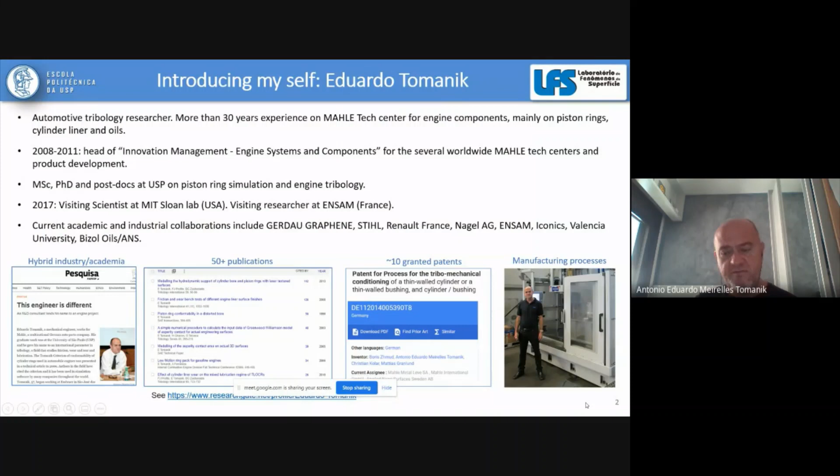So what I will cover today is: after a brief introduction about combustion engines and tribology, the impact of CO2, which nowadays is very important, and a little more detail about engine friction and the CO2 impact. As I told you, especially in Europe, this is a very important topic. There is a lot of talk and investment in electrification.

Then I will go into a little more detail on the lubricant regimes, oil viscosity, roughness of the parts in the engine, especially the cylinder liner. A few words about computer models, and something I have started to work on for less than 2 or 3 years: the use of artificial intelligence models to predict fuel consumption.

Okay, so we start with the introduction. Well, there are a lot of tribological parts in a vehicle, say from the engine, gears, brake, etc. In most cases we want to reduce friction. Of course, brake and transmission and the clutch are at least an exception.

What I will talk about today is mostly engine tribology, piston ring, cylinder bore, but the concepts about roughness, lubrication, etc. are valid in most cases for other components too. So for those not directly involved in engines, there may still be value in looking at the fundamentals, because the same thing applies to other components.

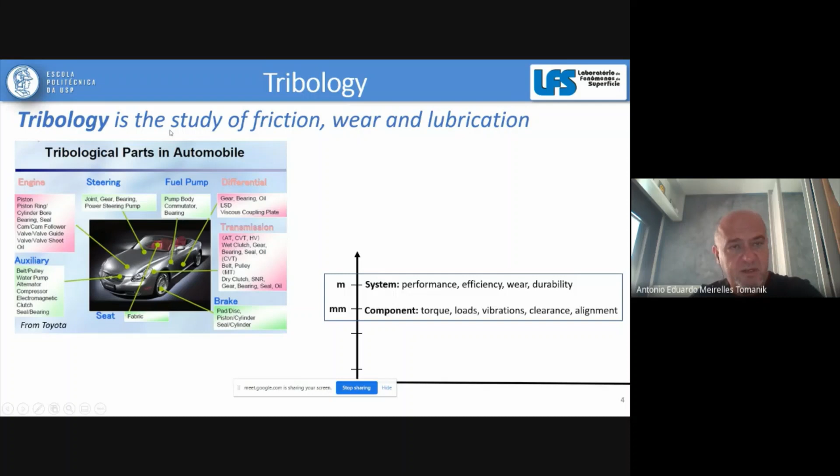Okay, so for tribology, most of us engineers work by looking at the system. We want to improve performance, reduce wear, and have longer durability. This is usually at the scale of meters or millimeters. If you go to the component level, then we want to calculate torque, loads, vibrations, clearance to assemble and under working conditions, etc. For tribology, the study of friction, wear, and lubricants, we need to go smaller to see in more detail what happens between the surfaces.

For example, it can be a piston ring and a cylinder liner, but it can also be a bearing versus the crankshaft, and it can even be your shaving against your face. Okay, we are not going to cover human tribology today, but that is of course a topic too. So, on the micrometer...

level, we pay attention, tribology pays attention to the contact - asperity contact, elastohydrodynamics. I will say a little more on that ahead. Wear, pitting, scuffing - we pay attention to the asperity. So even surfaces that appear to be very smooth, if you pay attention or look in detail, you're going to see there is roughness, and it has a strong influence

on the tribology. And then if you go to the nanometers, then we also see the tribofilms. Most oils have additives - anti-wear and friction modifiers. This is also important, although very difficult. Still, let's say, few universities really work on modeling of tribofilms.

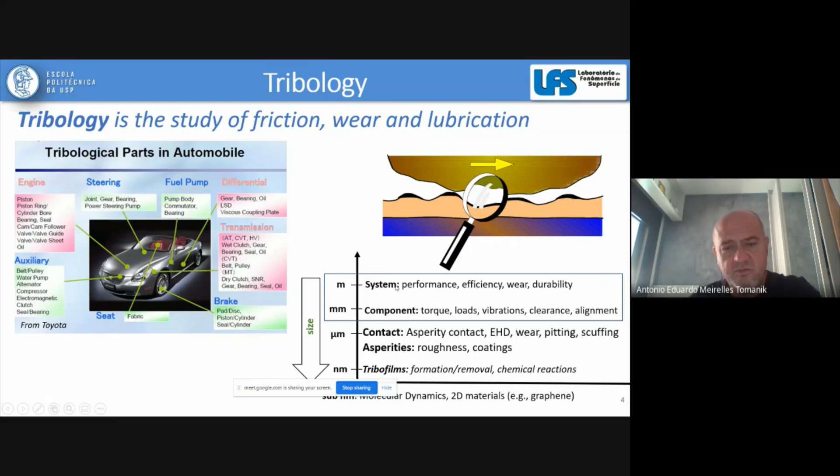And if you go to sub-nanometer, then there are so-called 2D materials nowadays, and graphene is one example, which is also my current topic of work, but this is too detailed for today. So today we are going to move around between micrometers and millimeters, okay?

So if you take any component that is rotating or sliding - you can say piston ring versus cylinder liner, or bearings, or an electric motor, and so on - usually we have the inputs from an engineering perspective: geometry, speed, load, materials, lubricant, temperature, and ambient conditions.

From the tribology perspective, we wanted to model, calculate, measure, and eventually reduce friction, wear, I would say also hydro and asperity pressures, but also noise and failures that we needed to avoid.

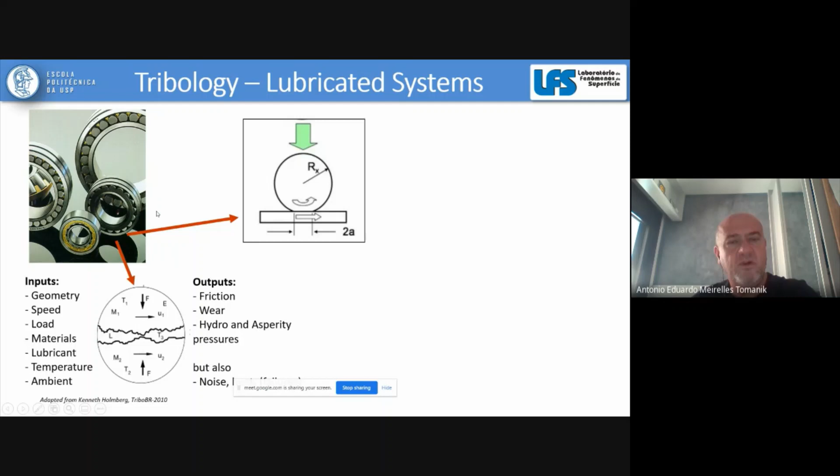So if you take an example of a rotating bearing, a typical component for most machining, not only in the engine but any machine that has rolling bearings, then there is a roller against the races, the external ones.

If you really go into the details, and this is the subject of study for tribology, we are going to calculate what are the pressures appearing here, what is the oil film thickness that separates the parts, which is very, very important. If you try to run dry, most of you know that the component will not survive. So we really depend on the lubricants.

For those not experienced, the oil film thickness separating the surfaces is in the order of 0.1 to maximum 10 micrometers. To give an idea, the diameter of human hair is between 50 to 100 micrometers. So we are studying things that are sometimes 1,000 times thinner than a human hair.

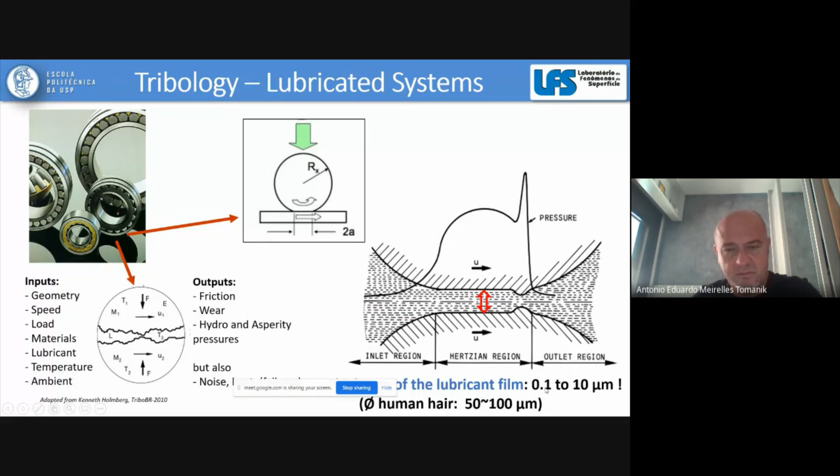Let me talk briefly about the laboratory I work in at the university. Remember, today I'm talking as a university researcher, not as an industrial researcher. There we have characterization tools and equipment to measure the surface, so we pay a lot of attention to the roughness.

We do a lot of modeling and simulation, and I will show some examples later on. We, of course, as most of tribology, do a lot of experimental work and tribological tests: pin on disk, SRV, and so on. We also do courses and lectures, as I'm doing today.

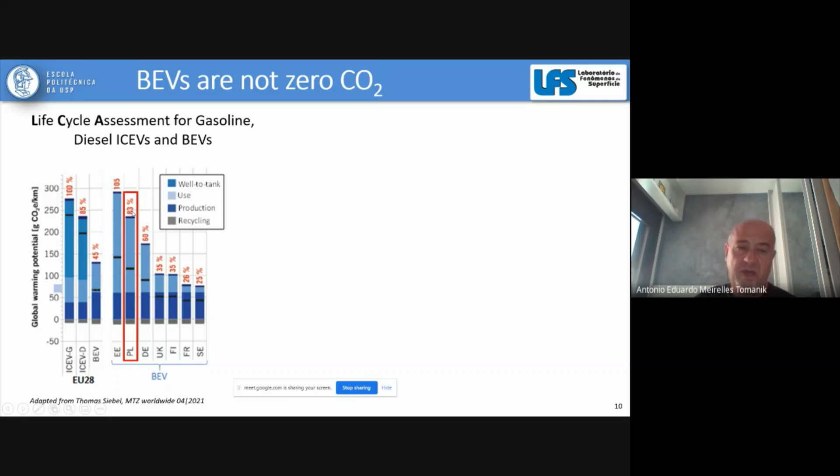So if you buy a new electric vehicle, probably for the first 2 or maybe 3 years, you have produced more CO2 than if you buy a combustion engine. And this is from Audi. References here, for the ones that want to check the details.

But also, in my opinion, a big problem is our trend to move to larger and larger SUVs. Data from Audi shows that if you buy, if you are rich enough, I am not, a large Q7 electric vehicle, indeed you are producing more CO2 along the life, 200,000 kilometers, than if you buy a combustion engine A4. And especially until 100,000 kilometers or so, if you compare this A4 and the Q7 Europe, in most cases you are producing more CO2.

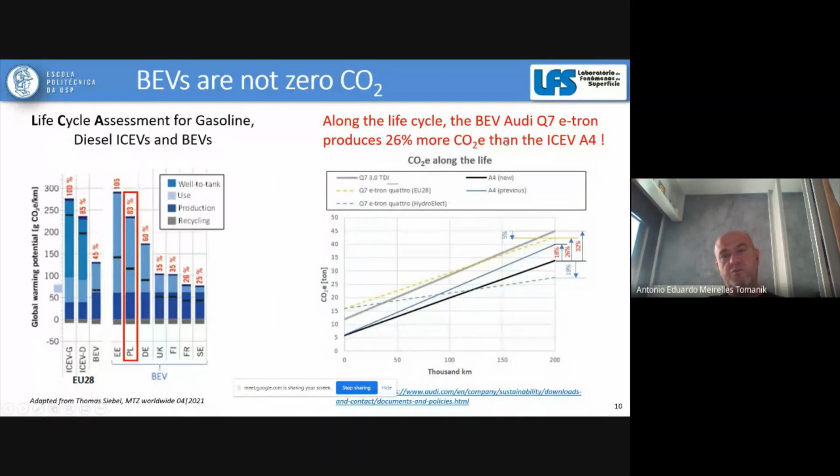Even if you move the electricity to a greener version, let's say hydroelectric electricity, you will still have to run more than 100,000 kilometers to reach the break-even, because you produce more CO2 to produce the car, the batteries, and so on. So this, in my opinion, makes it important that we still make efforts to improve the efficiency of combustion engines. Combustion engines will live for decades yet, so we need to improve and reduce the CO2.

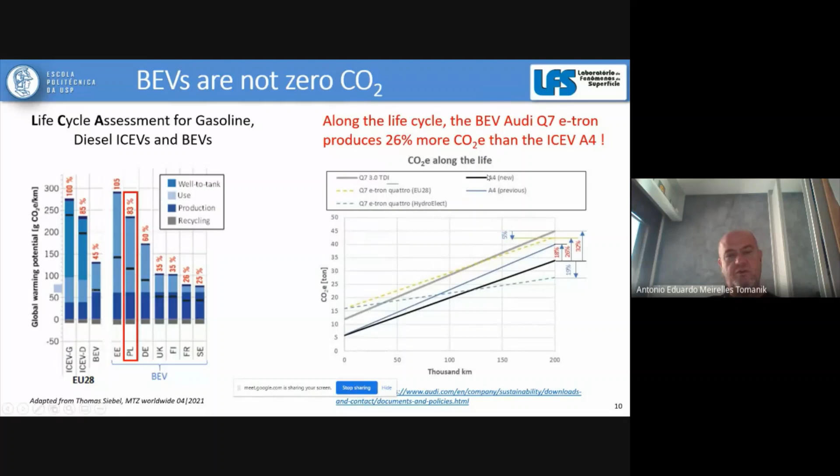I'm not going into full details, this is a little more complicated, but if you look at the references, almost all of them agree that engine friction losses are around 10% of the fuel energy. So most professionals and academics say, if I zero the friction losses, I'm going to save 10% of fuel. This is wrong, because you spend energy to overcome friction losses only after combustion.

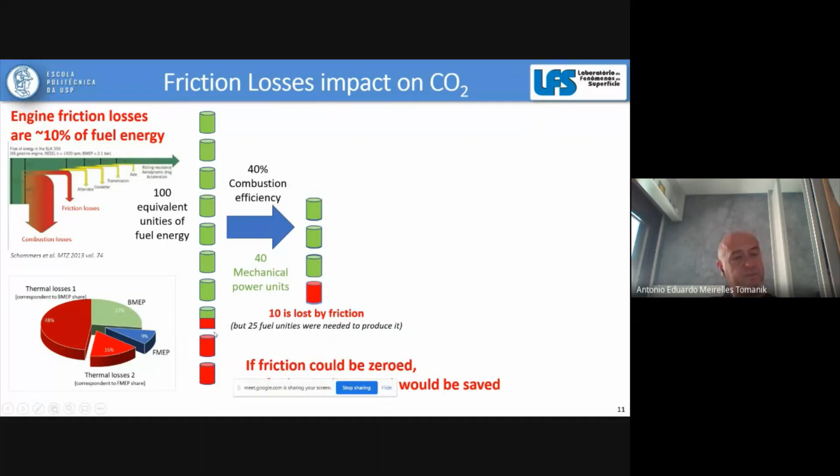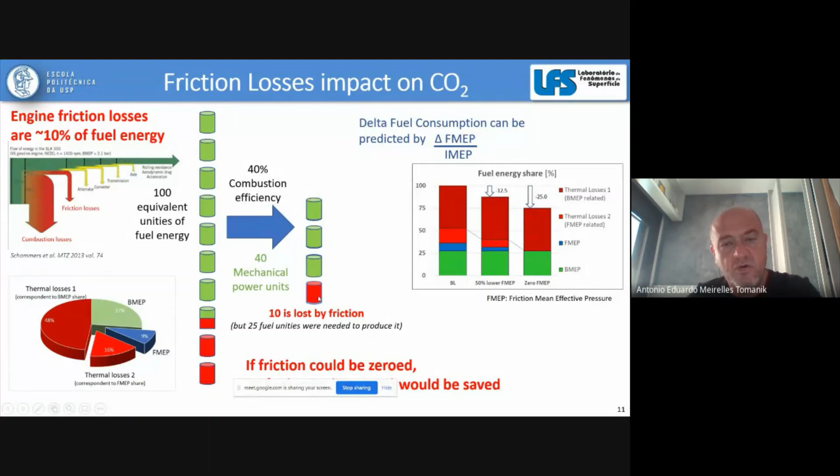And as you probably know, combustion efficiency is only around 40%. So in order to overcome the 10% of friction losses, you actually have to consume more energy. So indeed, to zero it would be very difficult. But for example, if you reduce by half the friction losses on the engine, we are going to save not only 5% of fuel and 5% less CO2, but 12.5%, because you need to consider the combustion efficiency, since friction losses occur only after you have converted fuel energy to mechanical energy.

In terms of friction reduction, if it's important to reduce fuel consumption and CO2, we need to pay attention to the components that produce more friction losses. On the combustion engine, about 50% is produced by the piston, liner, and ring.

You can visit this slide later on, but I would like to remember, we wanted to reduce friction, for example, on the piston, by increasing the installation clearance to reduce skirt roughness, to make a shorter skirt, but very importantly we need to keep the durability. If you increase the installation clearances, maybe you have noise problems. So in all cases, we have to make compromises in order to reduce friction and wear while keeping good engine performance.

The same for the ring, for example, it's relatively easy to reduce friction losses if you reduce the tangential load of the ring, but there is a risk of increasing oil consumption and so on.

As an example, this is a Brazilian case we did in 2013 with computer models, shown in red. This slide is more to motivate you. Later on I'll give more details on how we ran the computer models. We estimated that by improving the components, we could reduce friction by 12%, and for a given engine, we could reduce fuel consumption by about 2%.

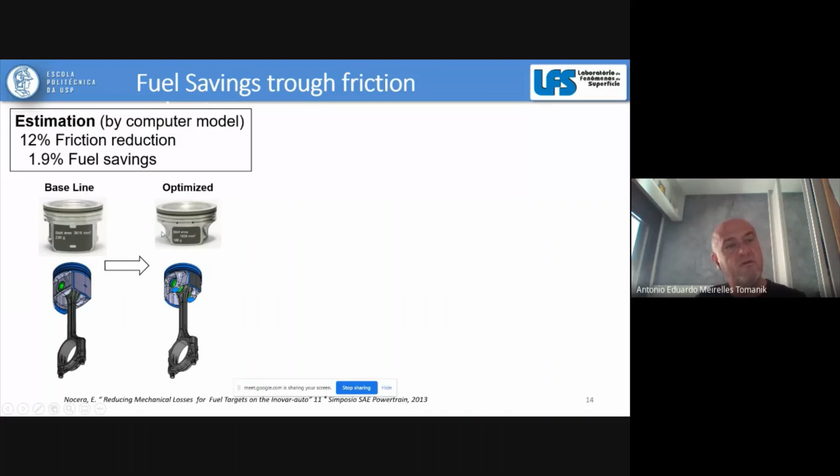So we went to the OEM, the car manufacturer, presented the modeling work, asked for the engine, and 6 months later, with the improved parts, the car manufacturer measured not 12% but 21%, much more. Details I will not cover today, but there are some reasons for that. And fuel savings at that stage were the same order that we had predicted.

FTP is the urban transient cycle for emissions in North America and also in Brazil. So we got 1.3 and 2.3. The customer was very satisfied with the results.

Here are the savings on the complete engine map, speed by torque. And also here are the transients in terms of RPM and torque of the engine, because these emission transient cycles, for those familiar with them, are very complex. At that time, we were very happy to be able to simulate, predict, and obtain the results. The good thing about modeling is that you spend relatively little money to find potential good solutions, and only after that do you go to produce the parts, which costs more. This was also published in English in a Brazilian Congress.

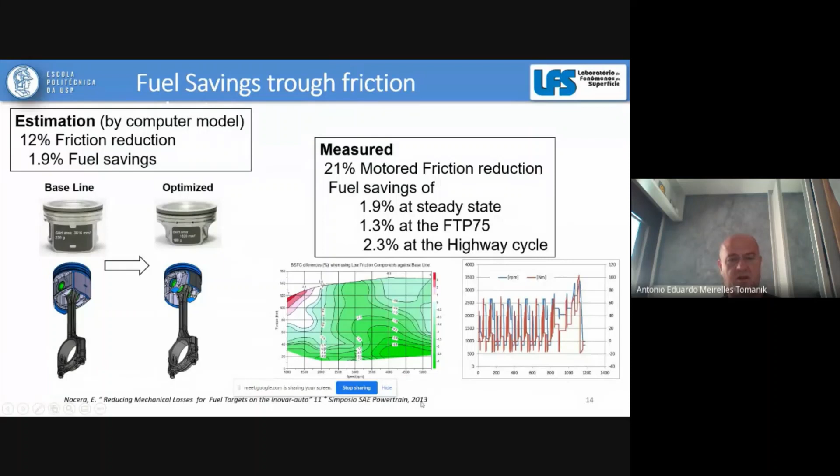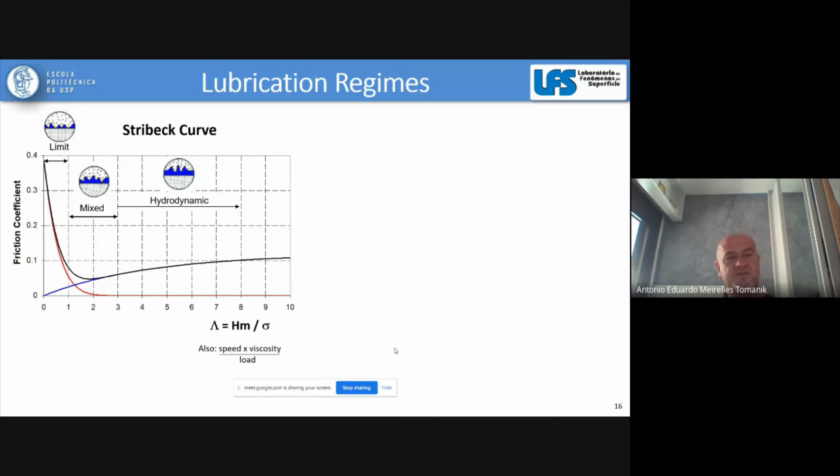Moving to lubricant regimes, oil viscosity and roughness. I used to say that if you wanted to understand tribology, the first thing you need to learn and really understand is the so-called Stribeck curve. Any tribology book will tell you about that, but in my opinion, not everyone really understands how to read this curve, and it's very important.

What does the Stribeck curve try to tell us? That the coefficient of friction depends on the separation between the parts divided by the roughness. So Hm is the oil film thickness, and sigma is an indicator of the roughness between the parts. If you have a relatively thick film, you are in a complete hydrodynamic situation, so there's no boundary friction, meaning no contact between the parts, and therefore no wear. This is the blue line.

But if you increase the speed, you increase the friction because it's hydrodynamic. On the other hand, if your load is higher or your surface is rougher, you enter what most components work in, the so-called mixed regime, where friction is a combination of hydrodynamic and asperity contact. If you go to very high loading or very low speed, you have strong contact between the surfaces, oil viscosity becomes almost non-dominant, and you face a risk of wear and scuffing. Books usually show what's called the film parameter.

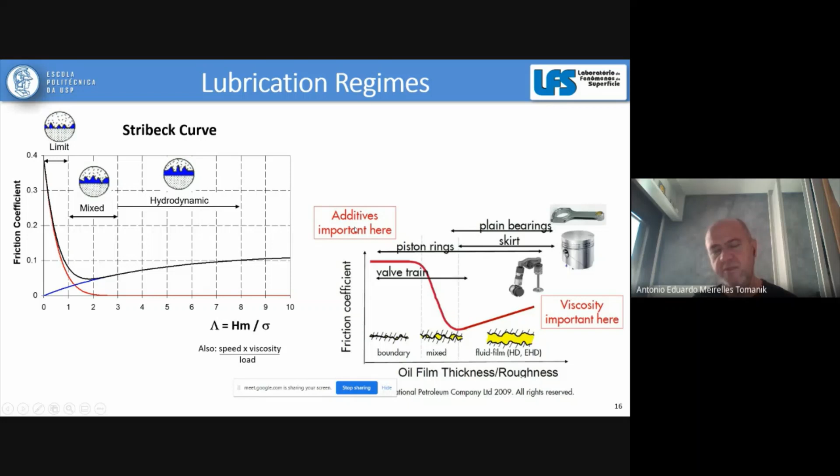So low viscosity oil will move it toward the mixed regime. On the other hand, when you have strong contact, oil additives become important - especially ZDDP, the common one for wear protection, and friction modifiers. Molybdenum is the typical one you find in engine oil.

This is also very important because when planning to study or run a model, you need to pay attention. It makes no sense to use boundary and mixed models for plain bearings and skirts because they work in the hydrodynamic regime, and the opposite is also true. The piston ring is one of the more difficult cases because it can range from boundary to full hydrodynamic.

I will talk a little more later on that.

Piston systems are very complicated systems because they're transient. The combustion pressure, as you know, goes from almost atmosphere to nowadays 220 bar or even higher for heavy-duty diesel. There are temperatures, so the components, take the example of the piston, due to thermal deformation, change the profile and dimensions from the drawing.

This is an example. The piston is hotter on the top, so it thermally deforms more, creating things like that. Also, if you take the engine bore, the region between the bores is more difficult to cool.

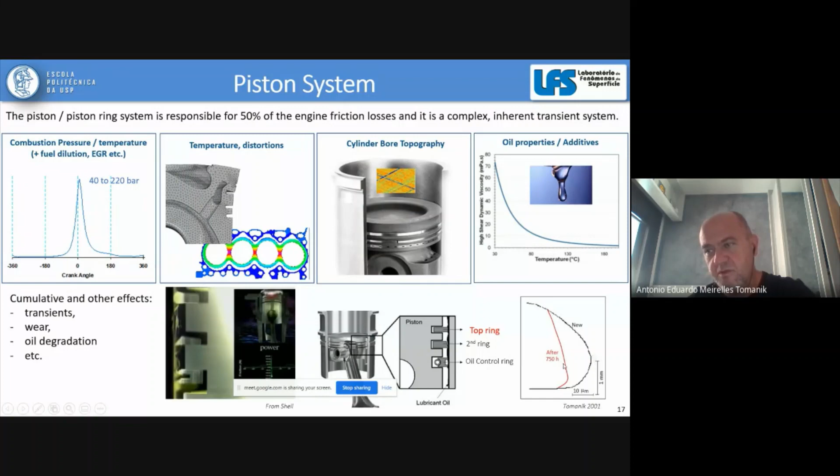There are only a few in the world - in Japan, Germany, and Brazil we have one. They can measure the friction at each crank angle of the piston versus the piston ring.

So if you want to understand wear and scuffing, you need to pay attention to the top dead center. But if you want to save fuel, since at mid-stroke the speeds and power are higher, friction losses are higher, you need to pay attention to the mid-stroke. This combination is not trivial - it's complex, but necessary if you want to solve both friction wear and fuel consumption.

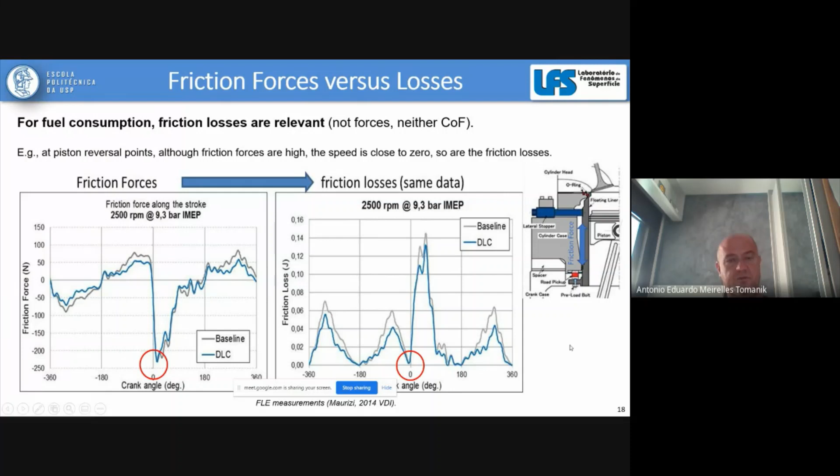Going to some real cases now, okay?

Most car vehicles in Europe and Japan now use what is called thermal spray. So instead of cast iron, which is still common on heavy-duty diesel, they use an aluminum block but with a coating of thermal spray. Different car manufacturers use different solutions, eventually similar but with different names.

So some of them are called PTWA, LDS - this is mainly Daimler, BMW, and Nissan - and it's very smooth. If you see it, it's very, very different from normal cast iron honing. I will give a little more detail.

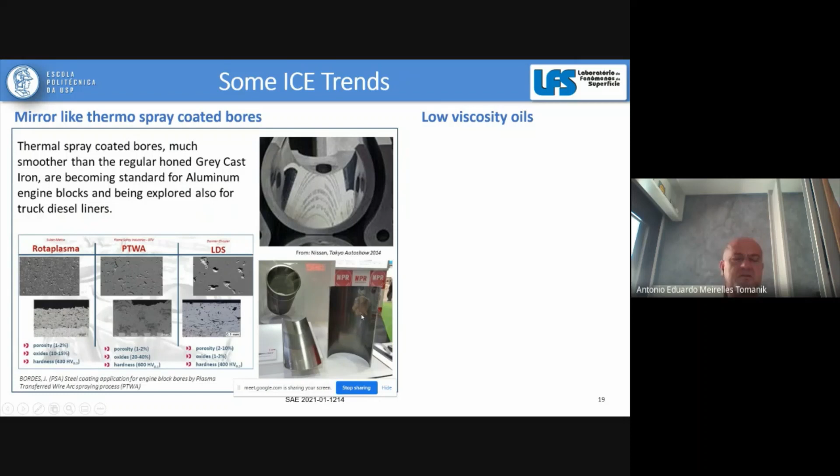It's so smooth - this is a real photo, and there is a paper on top, so this is the reflection. That's the reason it's called mirror-like. Here is another photo, also from this case, from Nippon Piston Ring and Hino, a Japanese diesel engine in this case. You can see the reflection of the hand of the guy.

I will say a little more on that because it's a very hot topic to investigate nowadays and needs special attention.

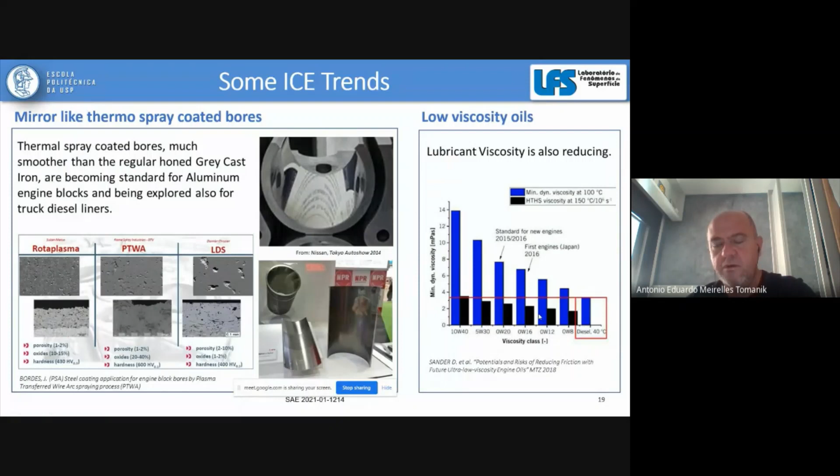This may be 2 times more viscous than the diesel fuel, so this is very good for fuel saving because you have very little hydrodynamic friction losses. But as you can expect, there are also problems of contact.

I'll start to go a little faster because I'm spending some time. In most research groups, when you want to optimize cylinder bores, this is the way we do it at São Paulo University. We start with actual cylinder bores or prototypes, do very detailed topography measurements, then go to rig tests, modeling, and finally to engine models.

These approaches are not only academic. Here I reproduce papers from industries about the same topic, for example from Audi, from Daimler, and so on.

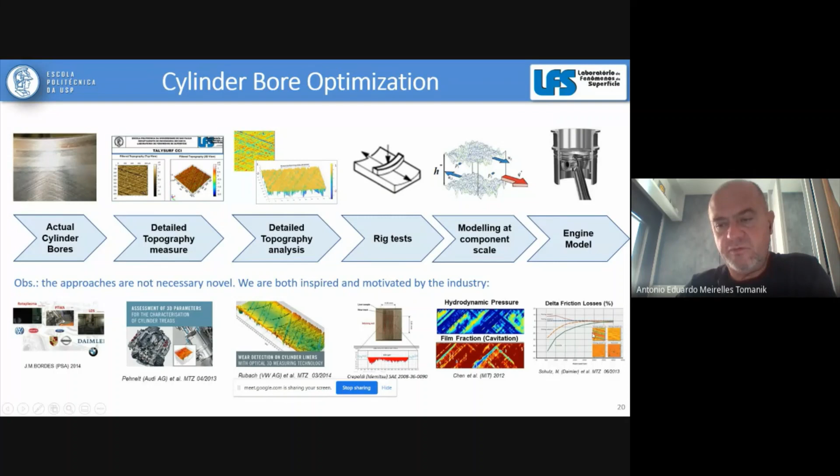Very important: I told you the Stribeck curve is, in my opinion, the first and most important thing you need to know about tribology. And if you remember, roughness is important to understand because the Stribeck curve uses oil film thickness divided by roughness. But most people use Ra or Rz as indicative of roughness, and I consider this very risky, not to say wrong. Why? Because both Ra and Rz do not differentiate a peaked surface from a valleyed one.

So these two surfaces have the same value of Ra, and you can imagine a part sliding here - this will have a lot of contact and wear, while this one probably will be very good. So Ra and Rz are not enough to describe roughness in most of our components.

So please use at least the Abbott curve. This was developed by Volvo decades ago, and they use 3 parameters called Rpk, Rk, Rvk - these describe or quantify the peak heights, the valley heights, and what is in the middle, the core. I don't have time today to cover that, but please do not use Ra if you want to investigate tribology. You need at least to use Rpk, Rk, Rvk, which most roughness equipment nowadays can measure without problems.

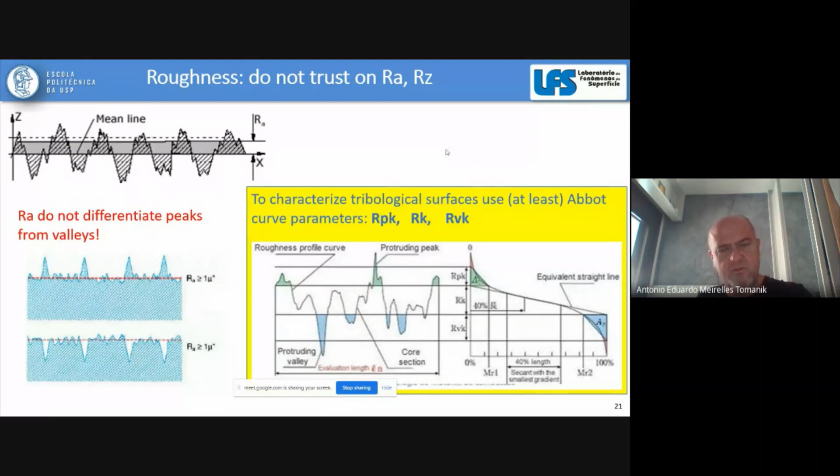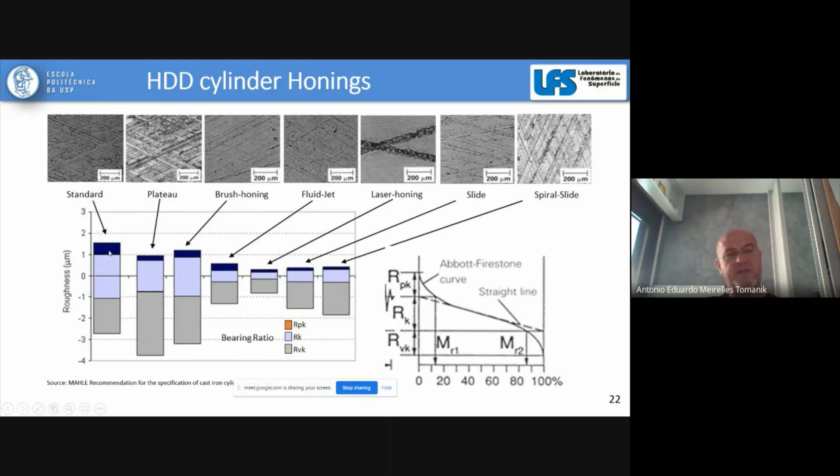This plot shows different cylinder honings from the standard plateau. This is for heavy-duty diesel. I'll show you next the ones for mirror-like finishes. In this plot, the dark blue color here is the Rpk. I like this plot because it separates what is the valley, what is below the surface, and what is peak above the surface.

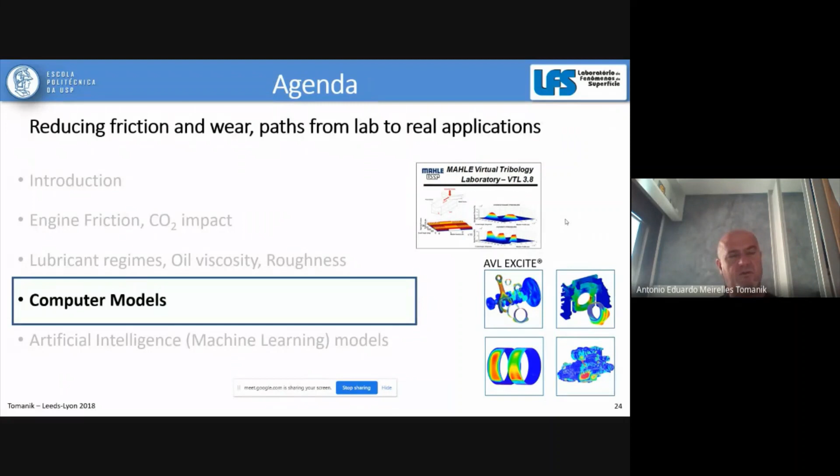Going a little into computer models - more and more engineering universities and industries are using computer models because they are cheaper and usually allow us to investigate things that would be very difficult to investigate by tests. But it's always the question: how complex or comprehensive should your model be? If you want to simulate the complete engine, or if it really goes to the fundamentals.

A good approach is usually to understand which problem you want to solve. If you want to improve the roughness of the cylinder, running a simulation on the whole engine would take forever and need a lot of data. So usually it's better to start from the fundamentals, as I'll try to show later on, and more and more move to the complete engine in order to know, for example, how much durability or fuel saving would be achieved.

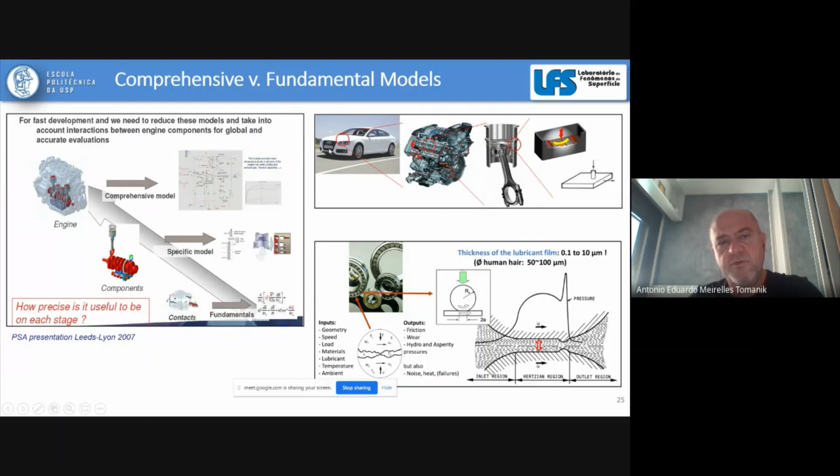So how you approach this is key to having a good strategy. The same goes for tests - for example, you can do car tests, but these are very expensive and have a lot of variation because you depend on the driver, the gasoline, and so on. You can do engine tests, component tests, or if you go to the fundamentals, a simple pin-on-disk test. Again, how you choose this depends on what you want to solve and how much you're prepared to spend.

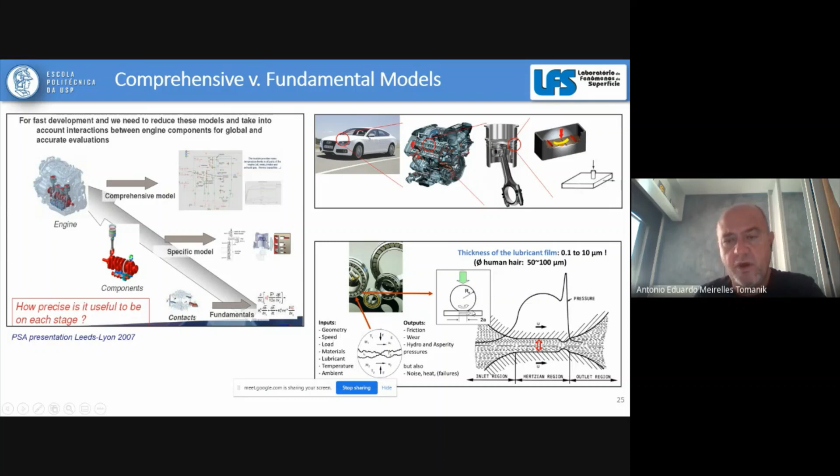And this I showed before - let's say if you go really to fundamentals, it's good to have some computer models to help you. I'll show some examples.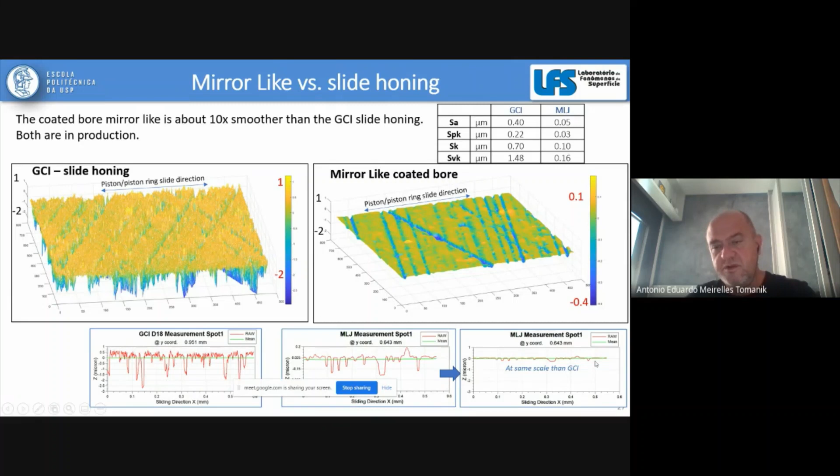One problem is that roughness equipment will increase the scale to show the roughness. So if you receive a measurement of the gray iron versus the mirror-like one, at first glance you may even consider this one rougher than that one. But when I put them on the same scale, from 1 micrometer to minus 2, you notice how smooth this new surface actually is.

You also need to pay attention to waviness. Usually your roughness equipment filters the waviness, and for most cases this is not a big problem. For the sliding honing, the amplitude of waviness, SWT, is around the order of the SA roughness. But for the mirror-like surface, since SA is much smaller, almost 10 times lower, waviness becomes important — it's 10 times higher than the roughness. So if you neglect waviness, you risk having problems.

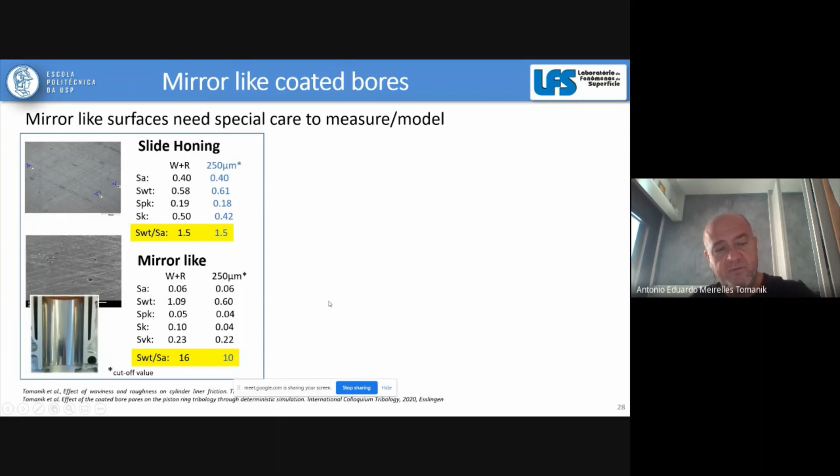This is covered in more detail in some of my papers. Also, every time I tell you, don't trust photos and reports - try to see the real part, especially since these mirror-like surfaces can easily mislead you.

Take this example: suppose this is a surface of a given machine or combustion engine equipment - I'll show later what it is. It has a very nice finish, with plateaus and some valleys to receive the oil. Most tribology guys will be happy with this kind of surface finish: a smooth plateau area that can support the contact, plus valleys and dimples to serve as oil reservoir.

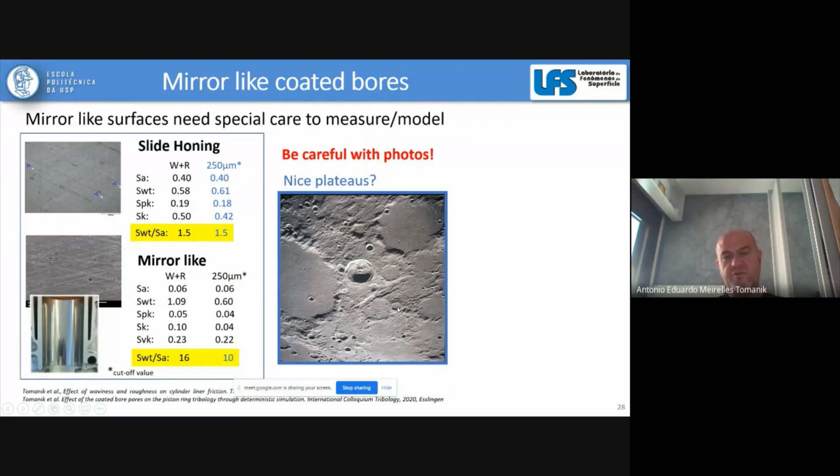But what do you think about this one? It appears very bad, very rough. So if one needs to choose between this surface finish and this one in red for low friction and low wear, most people will choose this one. But actually, they are the same - it's just rotated.

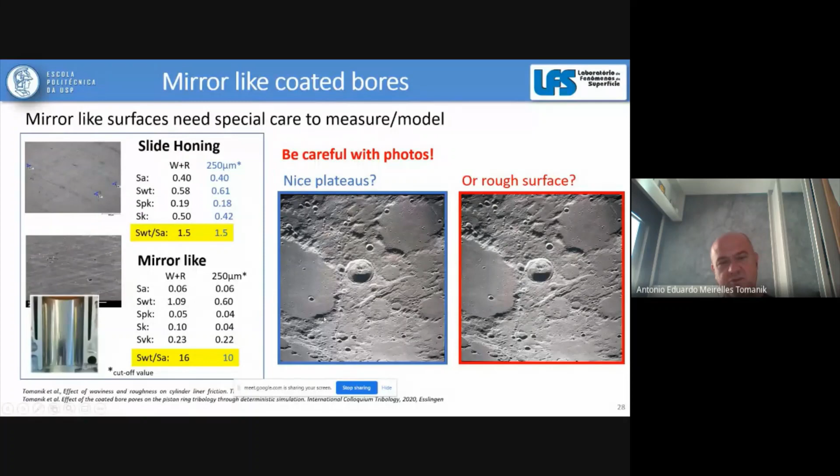They are the same surface, but our brain is used to thinking that light comes from the left. I don't know why - this isn't tribology, but it's how we think. So when you see shadows here, you think this is a plateau. I'll come back to this.

Same picture, same photo - I just rotated it. Now you're going to think this is a rougher surface. So, to be honest, I've made some mistakes myself. I went to study this because in the past I made mistakes where a surface with protuberances was actually dimples, or vice versa.

I'll go faster into the details, but at USP, together with MAHLE, we developed some relatively simple codes you can use to simulate, for example, a piston ring versus a cylinder liner - an academic version is available for anyone who wants to try. You input velocity, pressures, boundary coefficients, and so on, and it calculates the hydrodynamic and asperity contacts. Hydrodynamics are produced by the oil, and asperity contact is from the material contact.

In this case, I compare the same scenario: a piston ring moving at 1 meter per second, maybe halfway between top dead center and mid-stroke - at mid-stroke it would be around 10 meters per second, depending on the engine. Comparing 100 Celsius versus 40 Celsius, you see that at 40 Celsius, because the oil viscosity is higher, you get a much higher pressure.

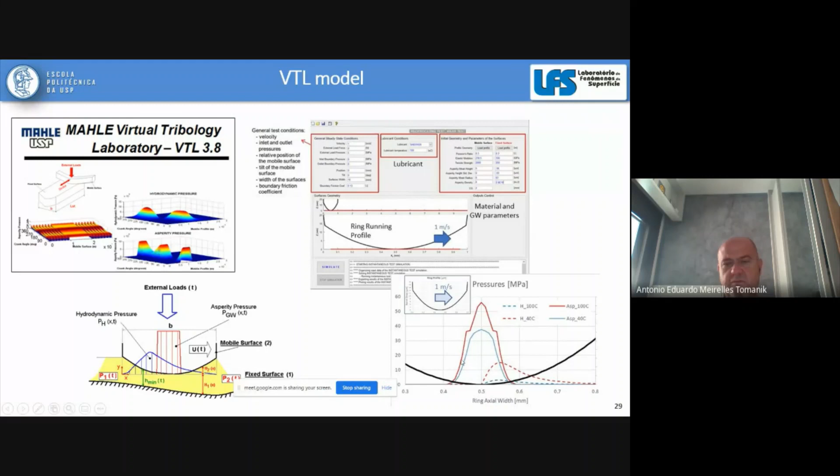Sorry, there is a mistake here, some colors problem. I will skip it, but believe me that when you increase the viscosity, you have more hydrodynamic pressure and less asperity contact.

At the time, we published a paper investigating several oil viscosities in a ring versus liner tribo test. Nowadays it's considered that at boundary conditions, if you decrease the viscosity, you increase the friction. This is not trivial, but believe me.

Then we ran the simulation and were able to predict some things. When we put the viscosity into this Stribeck curve, it's nice to see that all of the cases joined the same curve.

There are also effects of friction modifiers. As I said, for one of the oils we ran a formulation without and with friction modifier. The friction modifier was able to reduce friction in the boundary mixed regime, but when you increase the speed, it goes to hydrodynamic, so there is no influence of the friction modifier because there is no contact between the parts.

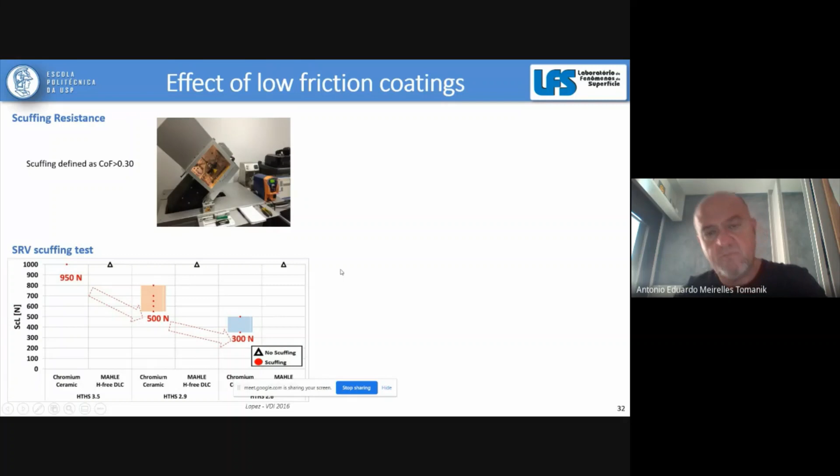There's also the case of low friction coatings, DLC for example, diamond-like carbon, but for this you usually need experiments. There are few models nowadays that can deal with that. This case shows a paper published by a colleague of mine in Germany, who investigated diamond-like carbon rings with reduced oil viscosities and the scuffing resistance. DLC was very resistant, high resistance, when using low viscosity oil.

We also made tests on engines. This is another paper, from a colleague of mine who is Polish, comparing the wear on chromium nitride PVD versus the new DLC ring coatings.

There are very good commercial codes. The ones I showed you are academic, relatively simple, but pay more attention to details. One that several companies use is AVL Excite. You can model almost the complete engine and even the car, investigating noise, vibration, and so on. This is usually what car companies have licenses and trained people for.

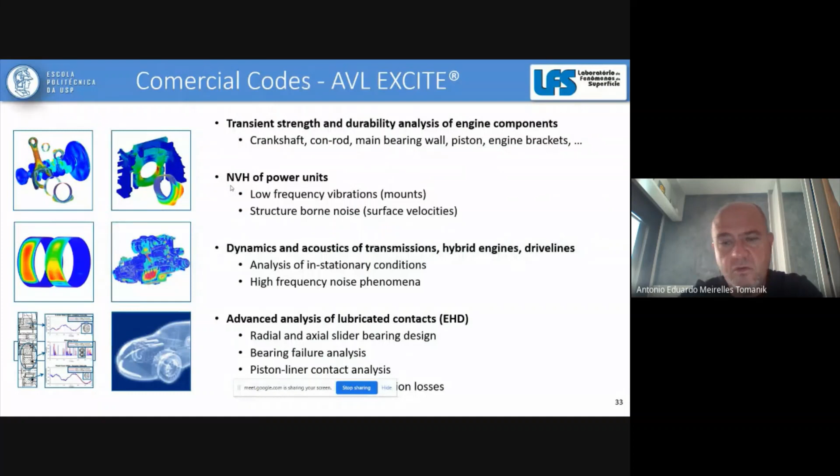At the university, we try to collaborate with AVL, running more detailed cases, not the complete engine. We've published some papers. I'll skip the details, but I call attention to the oil film thickness calculated by AVL for grey cast iron versus mirror-like surfaces, where the oil film thickness goes down to 0.1 micrometer.

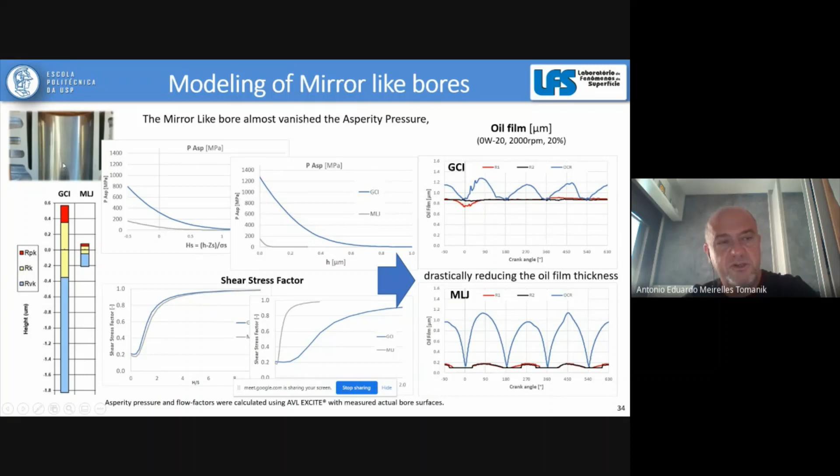This is, if you remember, 1,000 times thinner than a human hair. This is how cars are running nowadays, with such mirror-like surfaces, and working well, if you know. A little more detail, I will skip it, this is too detailed.

I'm running out of time, so to be safe, but we calculated the friction losses. In that case, at least, just reducing the oil viscosity decreases hydrodynamic friction losses but increases the asperity one, as predicted by the Stribeck curve. So indeed, at least for piston rings, there will be no advantage of reducing the oil from 10W40 to 0W20.

But if you go to smoother surfaces, then you have a big saving. So nowadays the main message, and we've published several papers on this, is that you need a combined approach. If you just reduce the oil viscosity, you may risk wear and asperity losses. If you just use mirror-like surfaces but keep the same oil, you're probably not benefiting from the more expensive surface finish. You need to use both, as car companies are doing: smoother surfaces combined with lower viscosity oils.

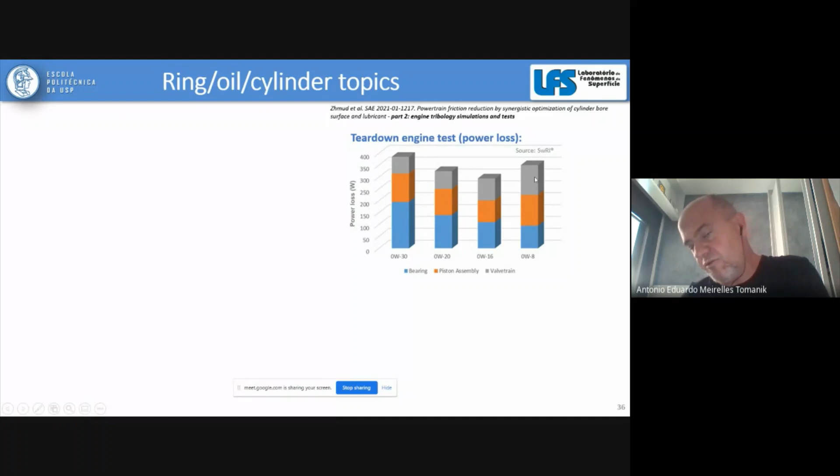Recently this year, we also published, in collaboration with Valencia University, papers using not only simulation but tear-down engine tests, measuring the friction losses of different components - bearings, piston assembly, valve train - for different oil viscosities. We found there is an optimum in this engine, at least 0W16. If you reduce even more the oil viscosity to 0W8, friction losses increase. It reduces for bearings because they still work in the hydrodynamic regime, but it increases a lot on the piston assembly and especially the valve train, which work in the mixed and boundary regime.

Then we investigated several cases, different velocities, different oils, and so on. I'll skip that, but the paper is interesting in my opinion. We also predicted the wear - the mirror-like surfaces, because they almost zero the asperity contact, are able to reduce a lot, at least by simulation, the ring wear.

Going to my last topic today: artificial intelligence. As you know, all industries, but also banks, medicine, all areas are using, especially, machine learning models.

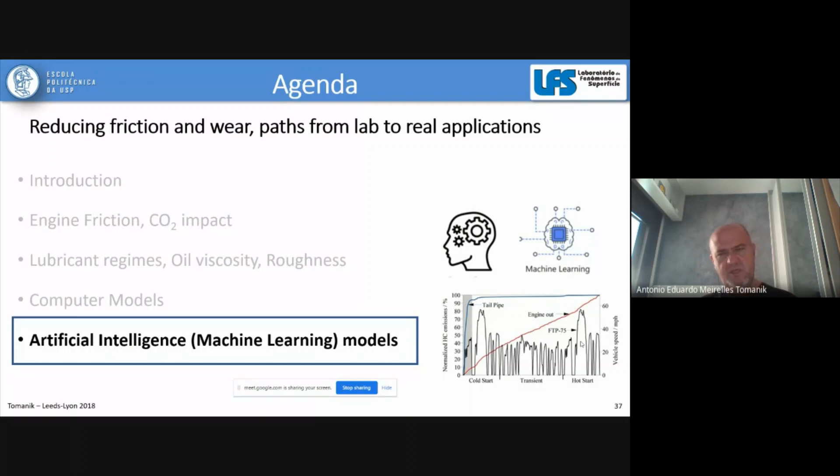I'll say a few words on that. I'm not really an expert, I'm still investigating and using that, but I see a lot of benefits.

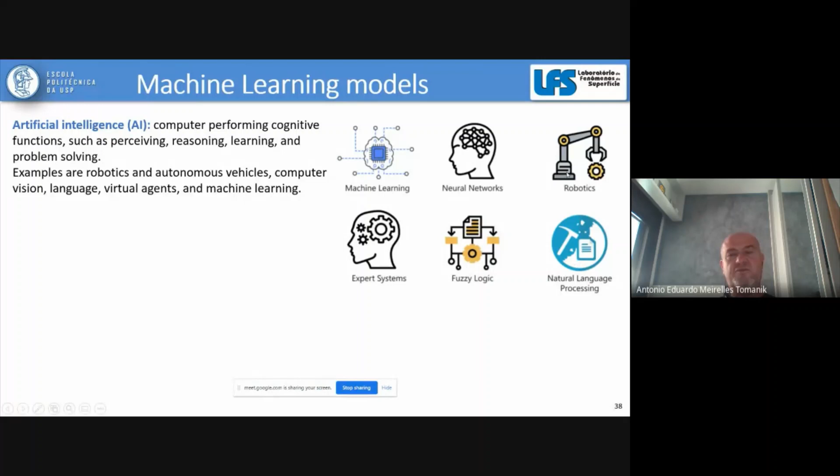So basic artificial intelligence is what we call it when the computer does things that we usually associate with human intelligence. It can go to expert systems, Google Translator for example, or robotics. But what I'm trying to use with relative success is so-called machine learning. In machine learning, we use artificial intelligence tools on very large data sets. We feed the system, the algorithm, with that large data set, usually experimental but can also be modeling, and ask the system to tell us the understanding and especially the predictions.

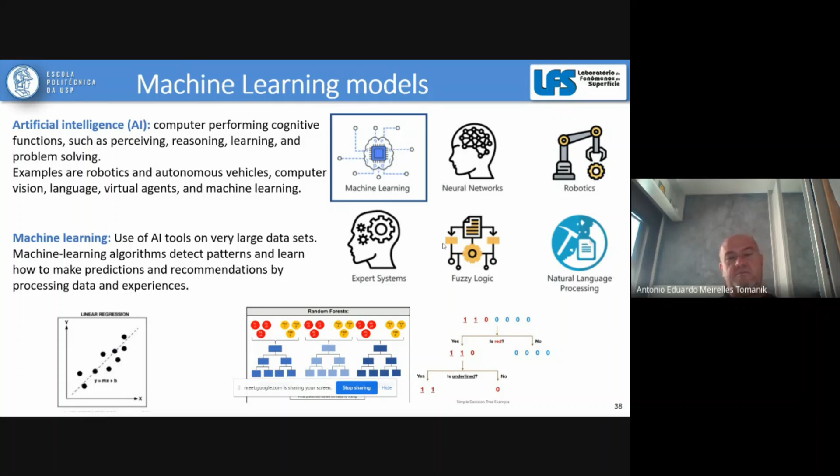I will try to show some examples. Especially for transient emission cycles, this is the one used in North America and Brazil, but European is relatively similar. And if you take what is called the real drive emissions, it's even more complex. This is the speed along the time. The cycle is usually divided by cold phase and hot phase, and only the cold phase of a given test produces almost 14,000 data points.

Speed, load, change of temperature, and so on - if you try to analyze by yourself, it will be very complicated. So in this paper, which is going to be published still this year, we use both a tribological model, that I'll detail later, but especially we use machine learning.

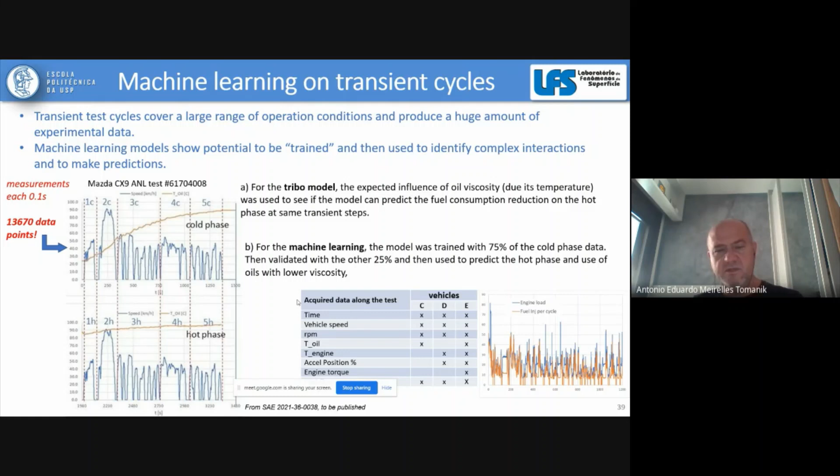In the paper we use data available from an organization in the United States called Argonne National Laboratory. For those interested, they have a very large public database on emission cycles. We used them to publish for three different vehicles. These are the vehicles, again, from that database.

From the tribological model, this is the measured value versus our model. You see that for most cases we are able to make very good predictions of what would be the fuel consumption. A few cases are usually the old ones - the engines, not going into detail, but for later on we abandoned such cases. For most of the cases we have a good correlation.

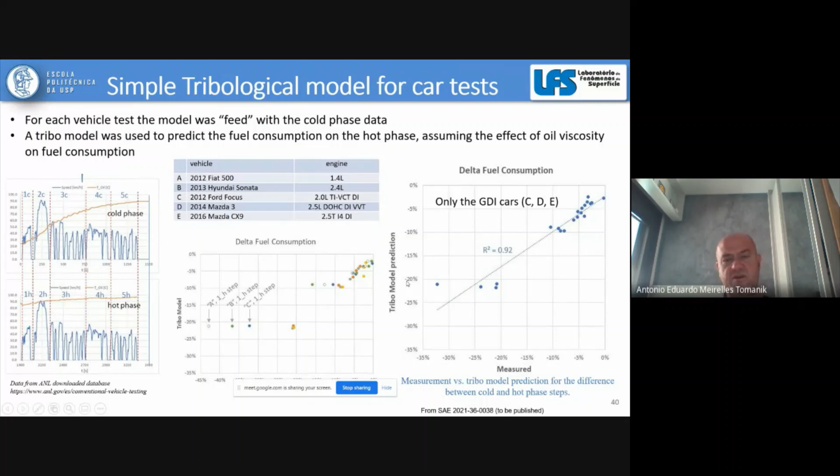So these are only the cars with gasoline direct injection. We have more detailed data from the test. I'd say to use machine learning well, it's good that you have a lot of data, but also good data, and we have a very good correlation between what was measured on the transient cycle versus our prediction.

It's too detailed, I'll skip today, but believe me we also use that one I showed, the so-called tribological model - it's more, let's say, theoretical based. This one is pure artificial intelligence, especially using what's called random forest, which makes decisions.

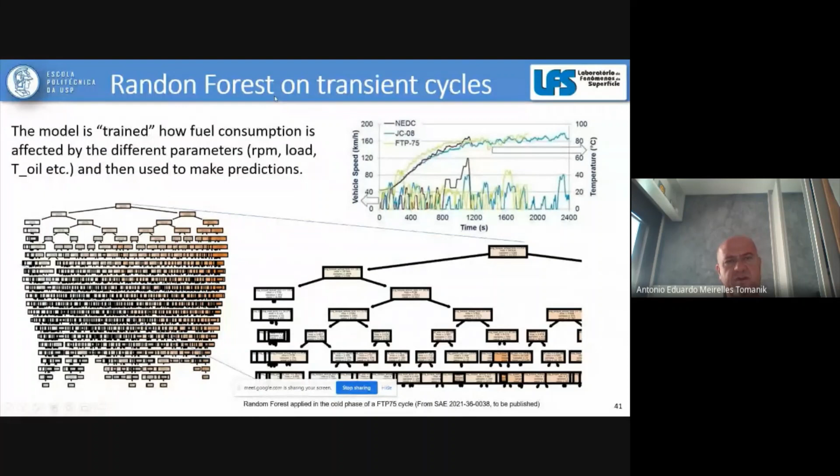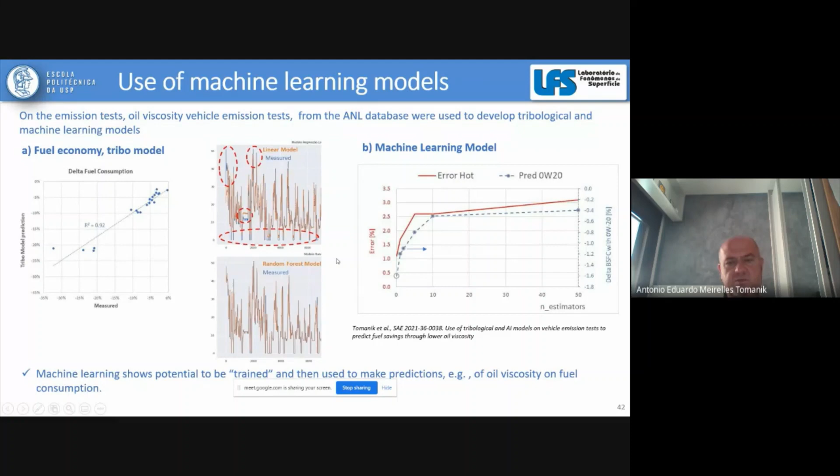So nowadays we are using this for other cases. I'll skip that - I think this one summarizes it. So we are being able to predict it, let's say. Sorry for being fast, really this needed a specific presentation.

To simplify, we train the machine learning model with the measurement at the cold phase, and then we use the model to predict how much would be the fuel consumption at the hot phase and the highway and other test cycles. Current models that we are using are able to predict the fuel consumption with an error of 2%, which we consider to be very good.

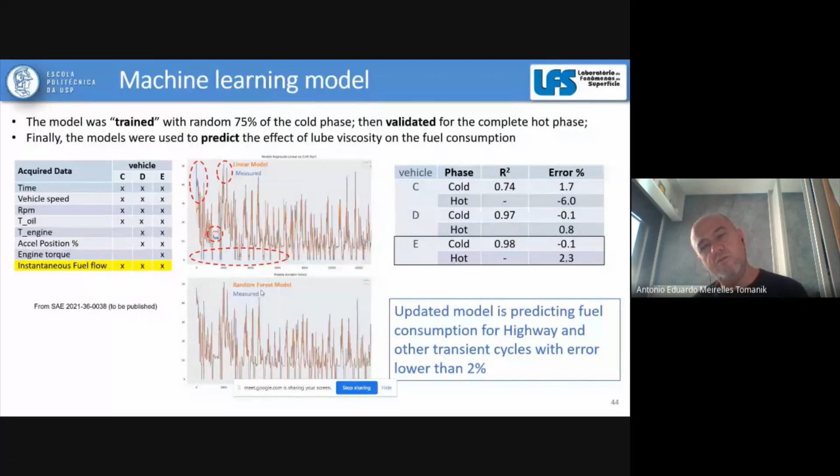So with much less information, only the cold phase, we can predict the fuel consumption at urban, hot ones, and highway within 2%. Indeed, what we want is to use the model to predict what would happen if we reduce the oil viscosity and so on. So after the model is trained, we can start to make questions to the model, especially for transient emission cycles. This ends my presentation today.

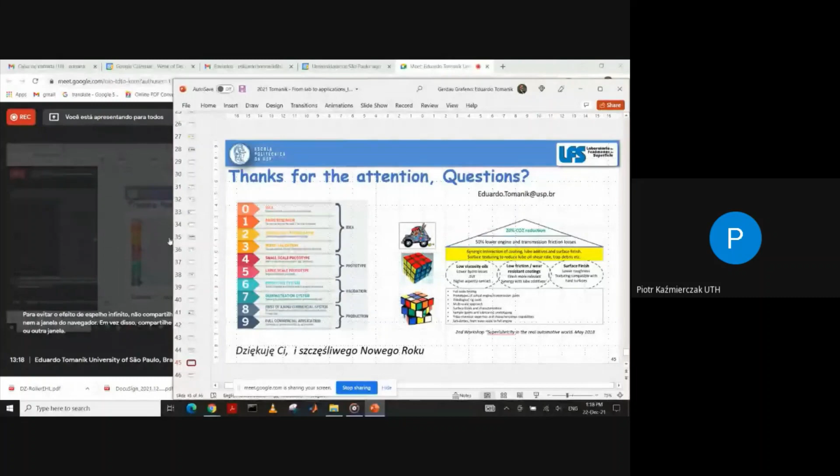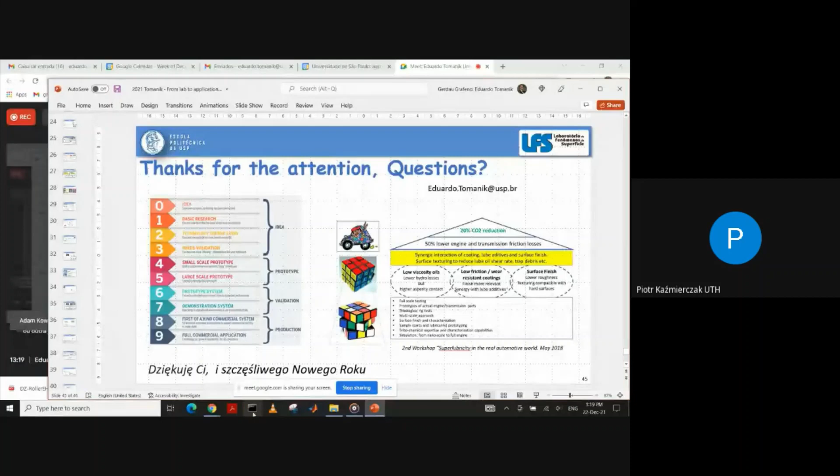One question that comes from Piotr is whether machine learning is feasible in engine design, in particular the shape of the piston ring. Are the results great enough? Well, for machine learning you need a very large data set. For the empirical one, I think that would be too expensive. But suppose you can run several simulations, input that into the machine learning, and then predict what would happen with a given design, or ask it to propose optimized designs. But my opinion, I will not use that.

It's usually good when you have a lot of experimental data. Suppose you are at Daimler or Volvo and you have thousands and thousands of measured parts after field tests, and some of them failed. If you feed all this information into a good machine learning model, maybe or probably you'll be able to find what profiles cause the problem, or when the problem occurs, what the profile is. But for the piston ring, the free shape is different, so I will not use that, because for machine learning, for artificial intelligence, it's better when you have a lot of data that's difficult to be analyzed by a human being.

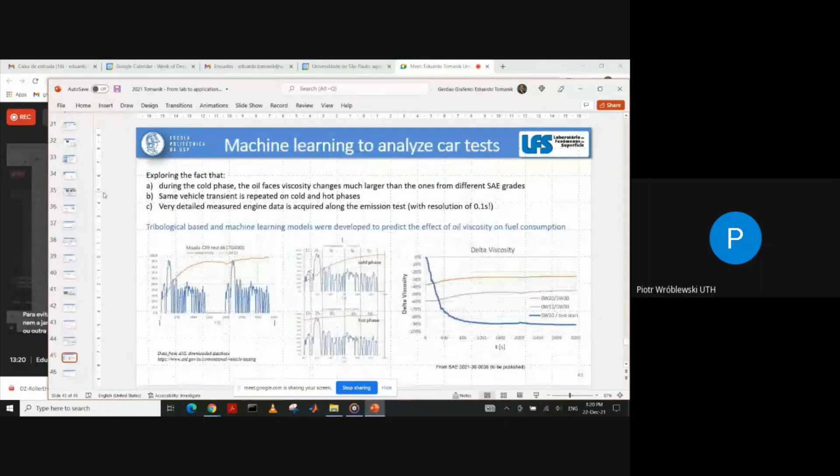Hello, my name is Grzegorz Koszałka. Very nice presentation. In one of the slides you showed the results of simulations for low viscosity oils.

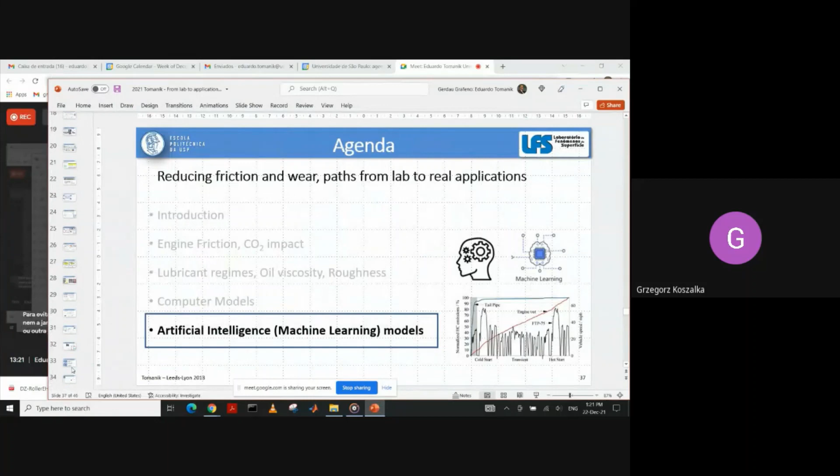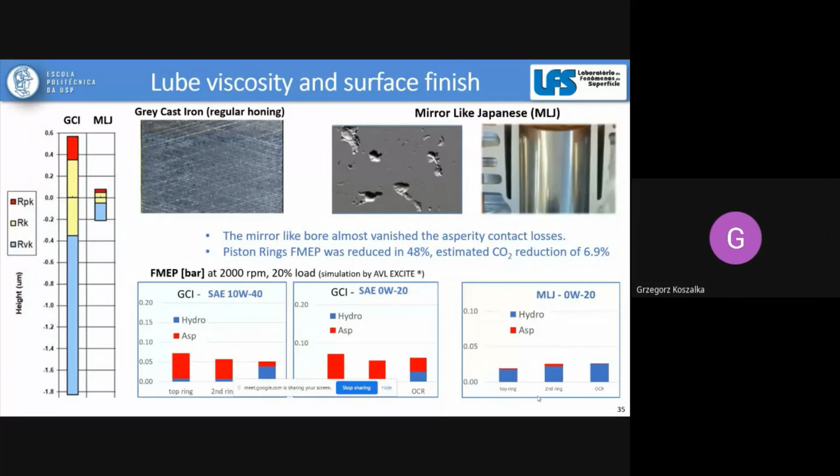Good questions. If you remember, you need to differentiate friction losses, and friction losses would be the friction multiplied by the speed of, in this case, the piston ring. So it will occur mostly at mid-stroke. But if you take wear, although the speed is low, pressure is higher. So in this case it's friction losses, and it's dominated, in this case, depending on asperity.

Let me try to remember, because we are at a relatively low speed and there is a rough surface. When we move to a very smooth one, then the asperity pressure becomes almost zero. This again relates to the Stribeck curve. If you have a rough surface, there will be contact. With a smooth one, there will be little contact, and most of the friction loss comes from elsewhere. See how it changes here: at relatively high viscosity, 0W20 in this case, there is almost no hydrodynamic effect, but a lot of contact. Sorry, here I am comparing roughness: with a rough surface there is a lot of contact; with a smooth one, we move from left to right on the Stribeck curve, so the contact almost disappears, but then we have an increase of hydrodynamic lubrication.

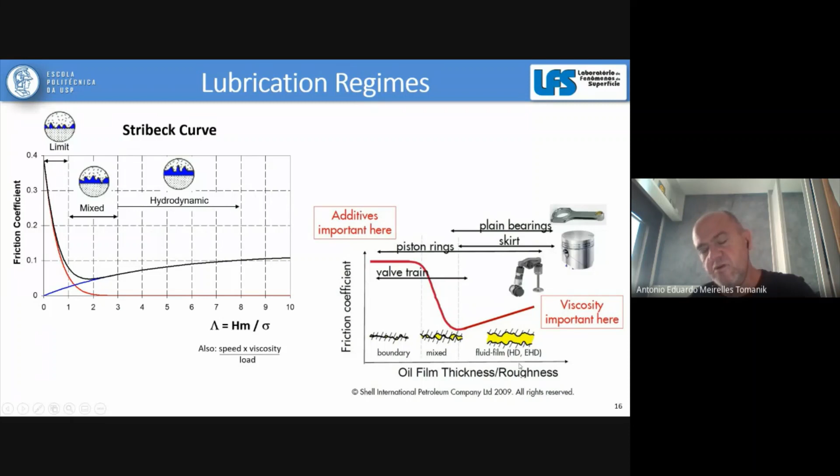Again, it's good to remember the Stribeck curve and where you are on it. For piston rings, you move through the complete curve. Take, for example, here you have a speed: when you have high contact, the speed will be close to zero, so power energy, which is speed multiplied by load, will be almost zero. Although you can have wear, and even scuffing in this case, when you consume a lot of energy to overcome the friction loss, fuel consumption would be more related to the hydrodynamic regime. I think this plot shows a very important difference.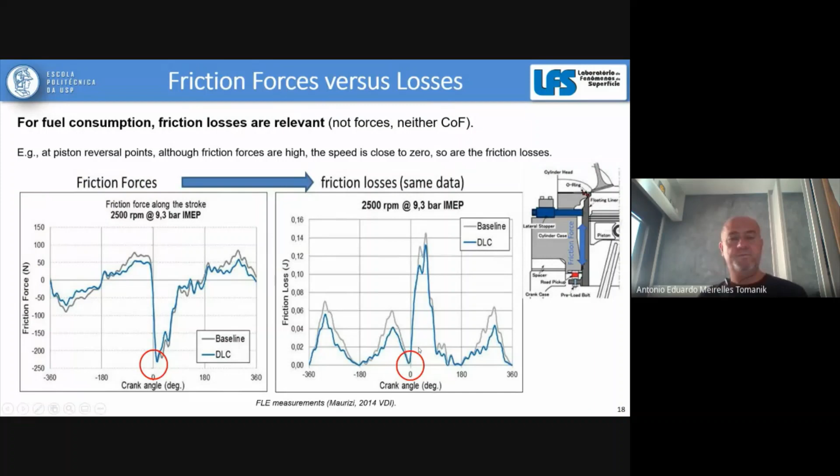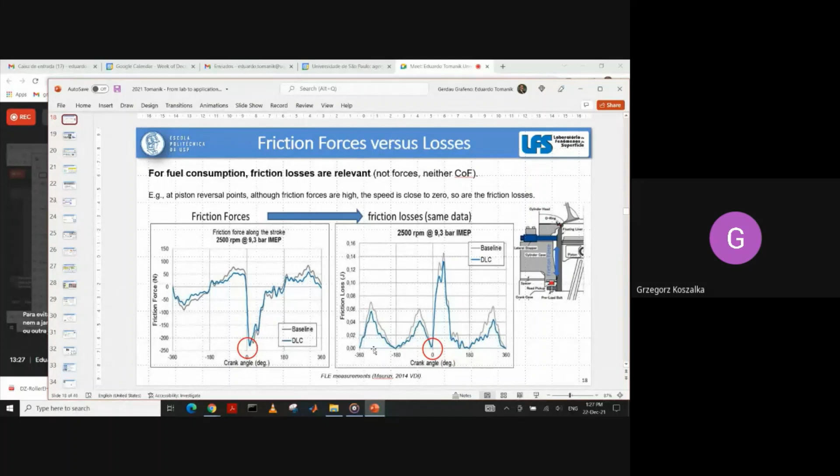May I add something? Of course. I wonder, in such conditions, because I think I more or less understand the Stribeck curve, but what happens if in a real engine, because I understand the results of simulations, but what do you think will happen with real engines if they work in such lubrication regime? What happens with the durability, I wonder?

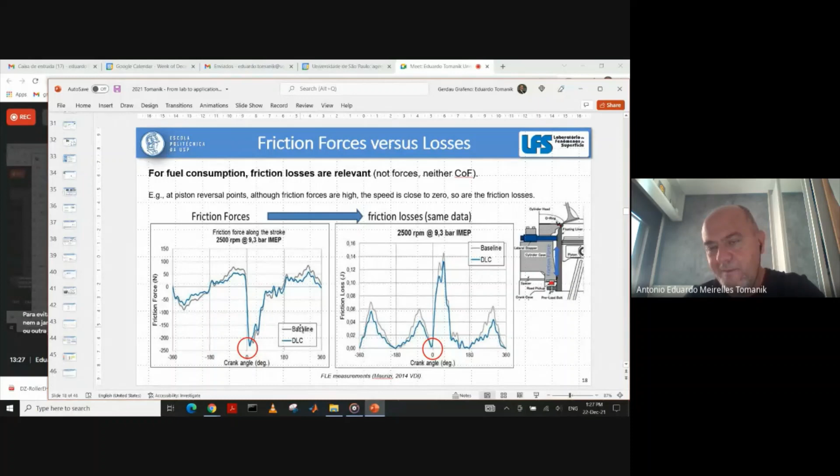Yeah, this is a good question, because here I'm showing only piston ring and liner. On the real engine you have the valve train, you have all the other components that somehow we try to investigate in a more recent publication. This was done together with Boris Zhmud and the Valencia University. You see for the different components: piston rings, piston skirt, main bearings, conrod, camshaft.

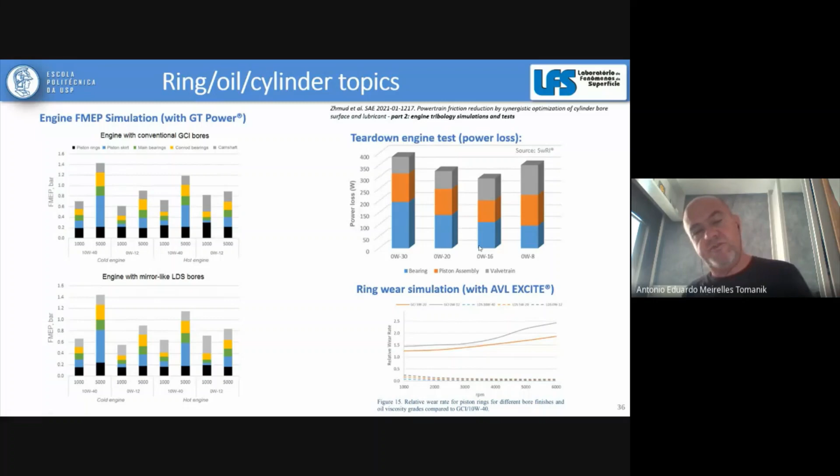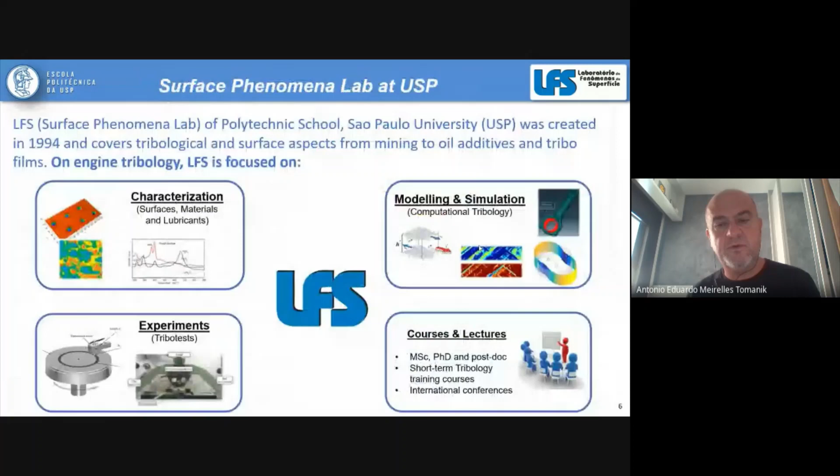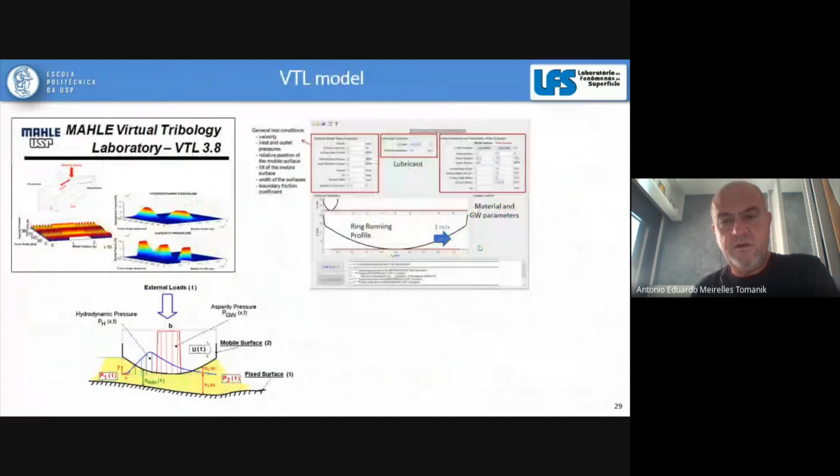So, from my industry experience, if you go to low viscosity oils, you have to improve your surface finish and you have to use a lot of oil additives. If you take, for example, nowadays the Japanese-like oils, but you can also find similar ones in Europe, you're going to find 800 to 1000 ppm of molybdenum from MoDTC. Remember this plot, for example.

Let me see if I have a better one. Maybe this one is better. These are experimental data of reciprocating ring on liner, but you can expect similar things in other components. When you reduce the viscosity - this is SAE 50 versus 0W30 - we have much more friction at boundary conditions, not in hydrodynamic but on boundary. So if you just reduce the oil viscosity, probably you're going to face more wear and even risk of scuffing or catastrophic failure. So what you can do is use oils with more additives, and nowadays the oils are using this. This compares, for example, the next one with friction modifier: green versus magenta are the same viscosity but with more friction modifier additives.

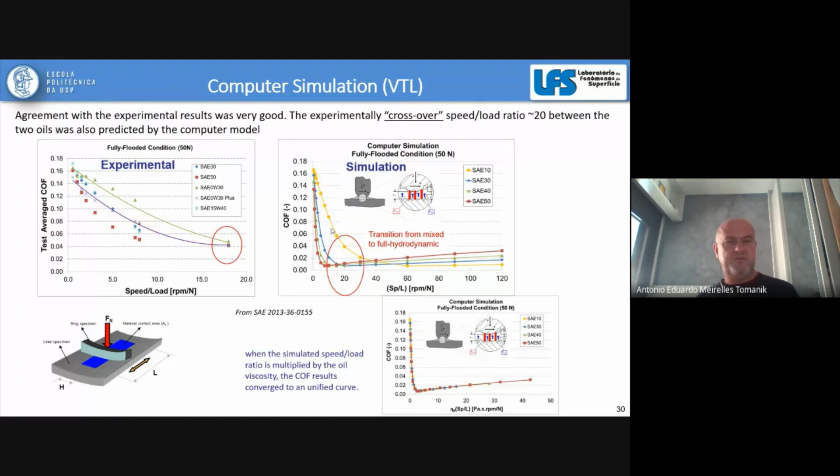When you increase the speed or reduce the load, more and more you move to hydrodynamics, so the additives, at least the so-called friction modifiers, will not have effect because here you're dominated by the viscosity. So you see that lower viscosity reduces the percent of friction, but on the boundary it's the opposite. So in a real engine, if you just reduce the oil viscosity, probably you're going to face a lot of wear. What does the industry suggest you do? First, improve the surface finish, go to smoother, mirror-like surfaces. The other one, use oil with more friction modifier and anti-wear additives, as they are using nowadays. I have some specific papers on that I can cover in another lecture.

Thank you very much. But this is not cheap. That is a problem, it costs money. These new oils and new surface finishes are usually more expensive to do, but because we want lower fuel consumption, especially lower CO2, most of the new vehicle engines, and even truck engines, are reducing the oil viscosity.

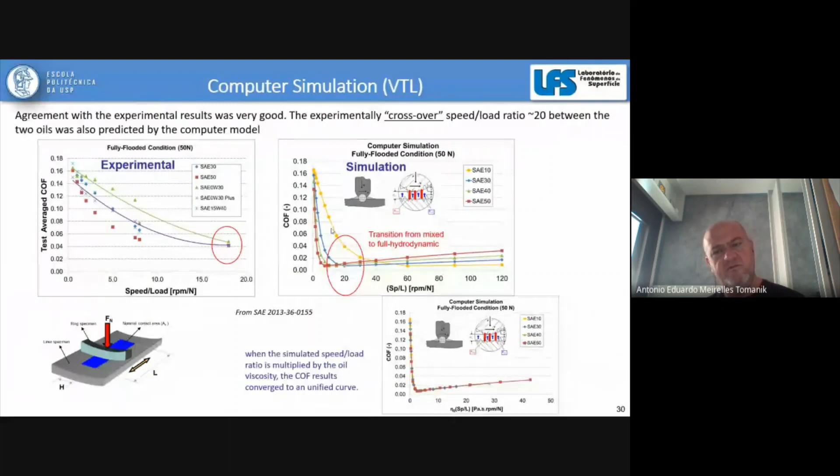For example, this one, a paper we did in 2016, we compare two oils - heavy duty diesel, 15W40 versus 10W30 - and we increased a lot because truck companies are increasing the interval between oil changes, from 150 hours full power at the dynamometer versus 500, so more than 3 times. You see that if you keep the same coating for the piston ring, they wear almost double. So what is needed? Either use a coating with lower friction and more wear resistance, in that case DLC, or use an oil with more friction and wear additives, or improve the surface finish.

Usually in the car or truck company, they do all the things together. They say improve the surface finish, use oil with lower viscosity but more additives. Same here for scuffing. If you keep the same coating, this chromium ceramic, very typical of older diesel engines, when you go to lower oil viscosity, described by high temperature high shear, the scuffing resistance decreases a lot. To fail, you have to apply 950 newtons. With the lower viscosity oil, only 300 was enough. But the DLC will survive even with the lower viscosity oil.

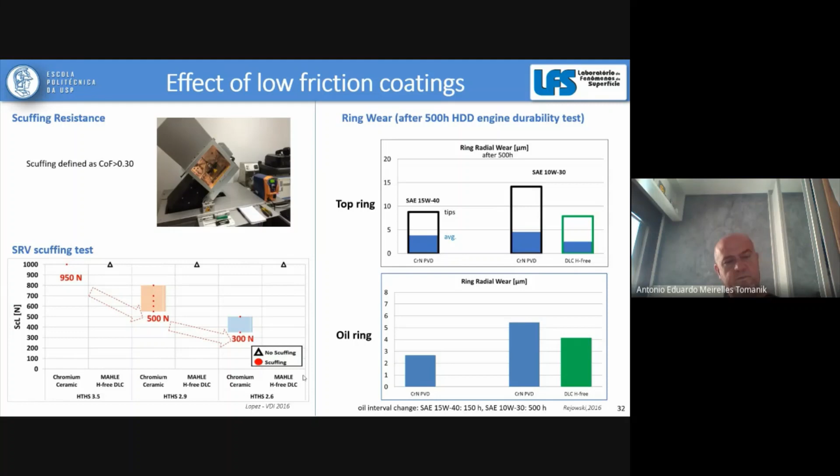Any other questions? Again, from Piotr, improve the mechanical and the engineering. This is what I just covered. So do not only change the oil viscosity, you need to improve the other ones too.

And if oil temperature is taken into account, yes, usually it is. If you go to the engine, usually you have a separate oil cooling, and most truck and car manufacturers stipulate how much the oil temperature would be, around 120 or so. And the worst testing protocols, when you go from very hot to very cold oil, use a separate relatively large oil cooling, and then you move from full load oil up to 120 Celsius degrees, if I remember right, and then you very quickly reduce the oil temperature in the engine, so you also face problems of cracking.

The head cover or so on. And if it's a simple test rig, then usually you can easily control that with some electrical resistance, so you can test at 30, 60, 90, 120 and so on temperature. And in the model, it also calculates the oil viscosity according to temperature. You put the input of the oil, describe the viscosity.

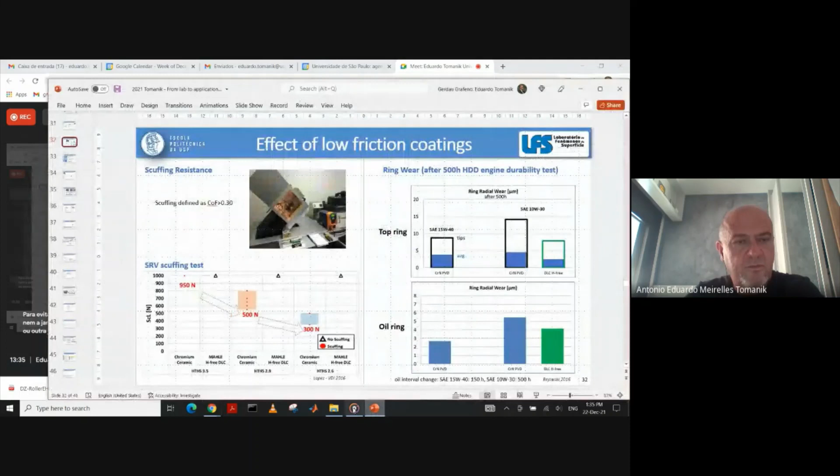Okay. We still have more than 10 minutes according to the agenda. So let's try to give my main messages if I can.

I think most of you work all the time trying to move from an idea to a full commercial application, or to solve a problem. So usually it's good to understand, suppose you have a failure in the engine. If you try to solve this without smaller scale prototypes or configured models, you have to be very lucky or have a lot of experience, because you're going to spend money. It's good to have relatively simple but theoretical fundamental tools, and vice versa. Don't trust the theories if you don't have empirical experience. You need to navigate through that.

And for combustion engines, in addition to durability, cost, etc., nowadays one of the main targets is to reduce CO2 emissions in order to compete against electrical ones and to reduce global warming. In terms of tribology, I think we can achieve up to 20% of fuel savings and CO2 reduction, which is a lot. If you remember the comparison with the electrical one, in Poland that would make the combustion engine have the same CO2 impact as an electrical one, if you take the complete life cycle assessment.

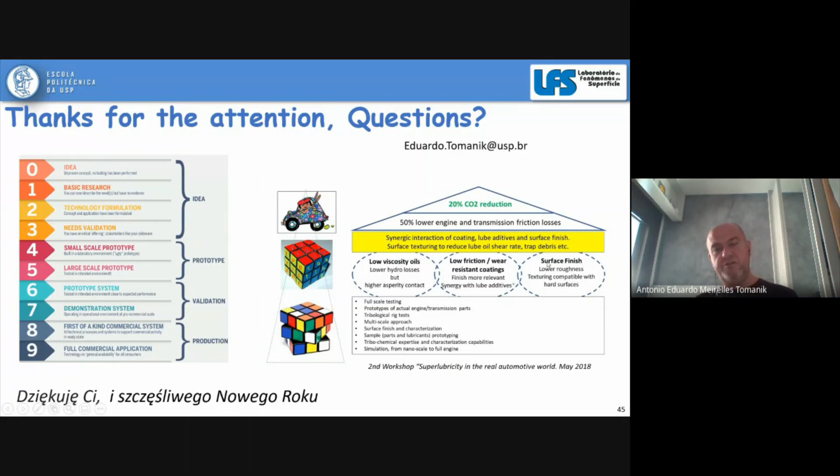Usually I am a mechanical engineer, so there is a lot of chemistry here. And today I'm also investigating graphene. There's a lot of chemistry here. We use low friction, wear resistant coatings, so go to chromium nitride PVD, DLC, thermal spray, and so on, combined with a surface finish. And this combination usually is not so easy.

Take, for example, diamond-like carbon. It's hard like crazy. So in order to produce it, you need to improve the surface finish. This is also where the theory, the academic work, needs to work with the industrial one. A university or tech center can invent a wonderful wear-resistant coating, but someone needs to produce that. So if it's very wear resistant, it means it will also be difficult to machine on the plant.

So this combination also you need to pay attention to. In order to achieve that, usually you can start because it's simple, because you can explore things that you cannot yet produce. I do this a lot. Let's say before producing prototypes, I start with some concept and simulation. I can change a number there, even if for the moment it would be very difficult to produce. So we can go from very fundamental ones to the full engineering.

For oils, we need to have a tribochemical expertise and characterization to be able to measure the oil, etc. Then you have to produce sample parts, lubricants, prototyping, surface finish, and characterization. What I call the multi-scale approach goes from, if you remember one of my first slides, the asperity contact to the full engine. It's also a combination not easy to do.

Most people will pay attention to either very small details, or on the other hand, to the complete engine, the complete vehicle. So a multidisciplinary group that combines theoretical guys with production guys is important. Guys or girls are important.

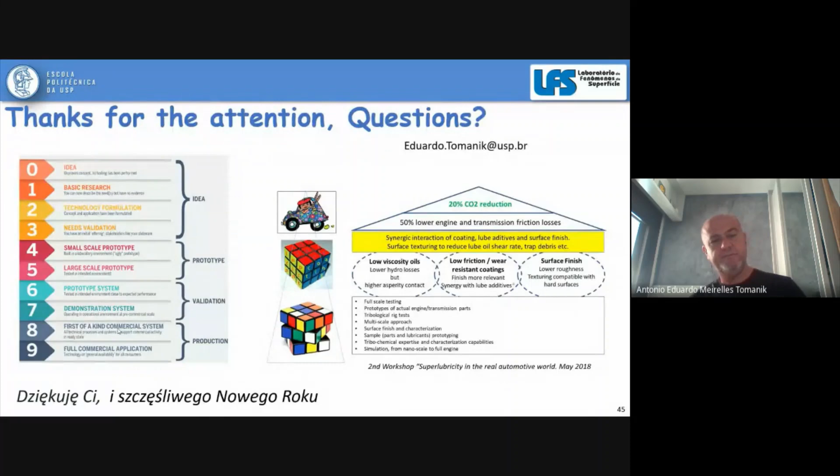Yes, thank you, Eduardo, for a very interesting lecture. I'm impressed with the chapter on machine learning.

Yeah, this is an area I am also very interested in. One reason is that if you have a good student with a computer, you can collaborate with another university and put together a lot of data. So it's something that appears to be very popular.

For example, my son works on this. Indeed, he was the one that ran the models for me. He used machine learning from a company that has nothing to do with engines. To be honest, it's for selling beers. The company is Heineken, and we receive information on when and where more beers are sold, and they use the model to predict how to deliver the beers, how much they have. A very similar machine learning tool was used for the engine.